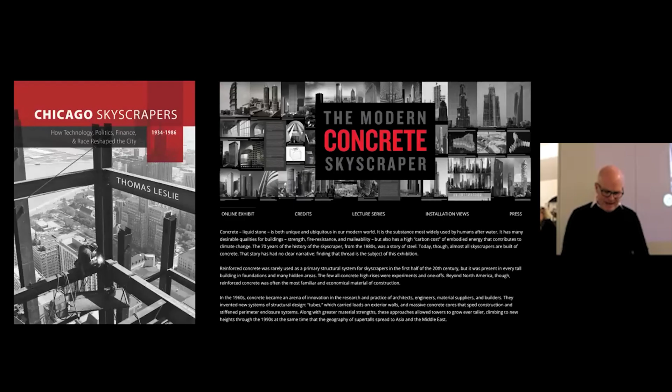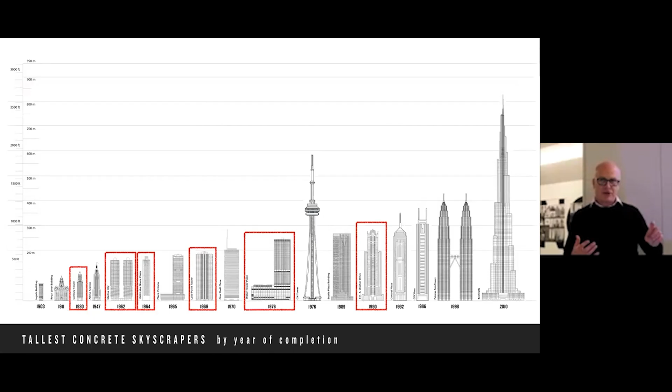The key moment for what I'm going to present tonight was, as we were putting together the timeline, Carol looked at it and said, you know, there are an awful lot of buildings here that are from Chicago, right? Chicago has a kind of outsized presence as we're looking at the tallest concrete skyscrapers throughout the 20th century. Is there a reason for that?

I couldn't come up with one initially, but we also realized that some of the buildings in the timeline were not in Chicago, but were designed in Chicago. This ended up being the sort of challenge for the research that I'll show tonight.

All good research projects ask more questions than they answer. And the exhibition really asked the question: what was it about Chicago that led to this particular phenomenon? And are there things we can learn from that, that we can extract from it?

So I want to go back to the beginning of the 20th century and talk about the trajectory of concrete in Chicago. I want to focus not so much on the buildings themselves, although they play a key role, but on not just the engineers, but another set of professionals and experts that lent their knowledge and their process to the quest for better concrete, and therefore the quest for greater height.

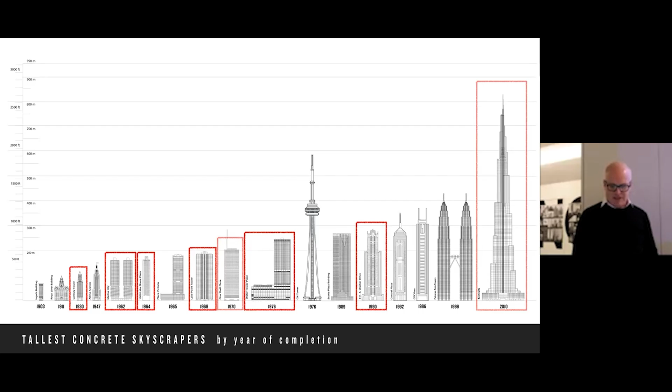Concrete in Chicago, I think you can trace back to the American pioneer of reinforced concrete, Ernest Ransome. Ransome was a British emigre. His family ran an artificial stone business in London, and he brought his knowledge of concrete first to San Francisco in the 1870s and 1880s, and then eventually to New York, where he famously built a handful of warehouses that pioneered his version of reinforced concrete.

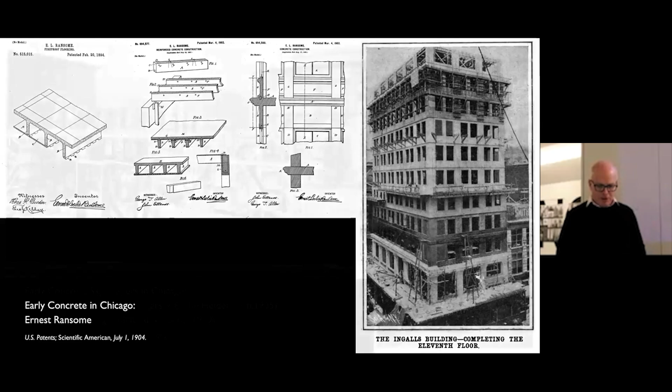And even though Chicago had nothing to do with it, I think you can look at the first generation of concrete high-rises or mid-rises that go up in Chicago and see the influence of Ingalls.

The material was relatively cheap. It could be built using carpenters instead of iron workers. And of course, it had a good track record by this point in containing fires, if not actually suppressing them.

If you look at the proportions, you realize that concrete was not a particularly efficient structural material at the time. Those columns are sized to carry loads. They're not the kind of fireproofing around a thinner steel column. The concrete is chunky and relatively weak, and therefore the material really has to be used in bulk to hold up the floor loads that it's being asked to.

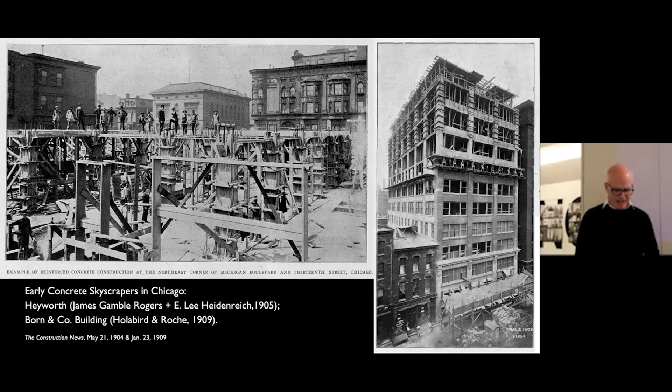Where there was innovation in the city was in a very different building type. The grain silos that populated the Midwest throughout the early 20th century were generally engineered by firms in Chicago.

Concrete around the turn of the century became the material of choice precisely because it was fireproof. Timber grain elevators built before 1900 tended to go up in flames very quickly, and concrete, as soon as it became commercially viable, was used as a replacement for timber.

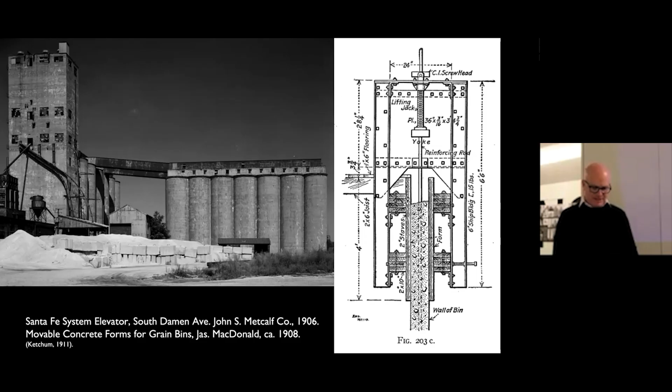Here you can see James MacDonald, an engineer who specialized in grain elevators. This is one of his patent drawings for a construction method we'd today call slip forming—concrete formwork on a circular plan that's gradually raised up as the concrete cures, so you can pour continuously from bottom to top. You'll see that come back in one particular set of skyscrapers a little later.

The buildings built around 1910 or so gradually show a few changes. You see the kind of skeleton frame that Ransome designed for Ingalls, which was the genesis of those early high rises. The skeleton frame kind of coalesces and starts to disappear.

The deep girders that carried the loads in the Born building and the Heyworth building start to get distilled into flat slabs and what were called mushroom columns—columns that flare out at the top, designed to prevent the column from punching through the slab, a phenomenon called punching shear.

These are heavily reinforced, and you can see them starting to look for ways to make the system more efficient. The girders drop only a few inches, which increases the floor height. The slabs get thicker, the girders get shallower, and you can start to see them coalescing towards what today we'd call a flat slab.

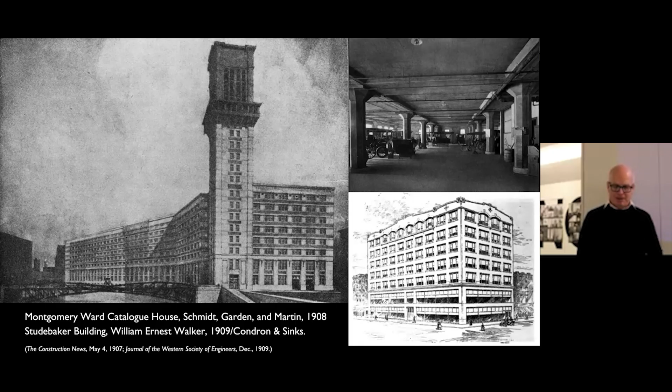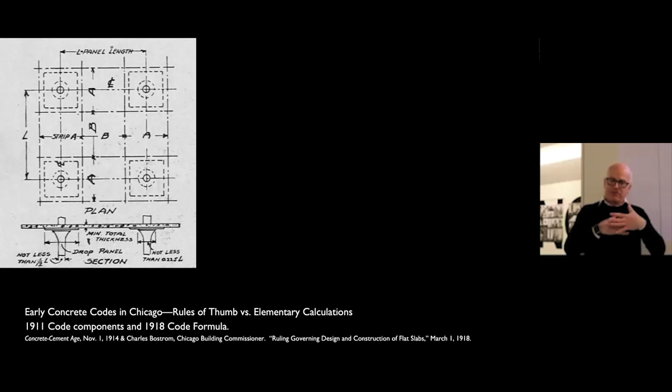The flat slab was the big desire in concrete construction because it stood to save on structural depth and therefore on building height. Flat slab is structurally thinner than a steel frame, so you could get more stuff into your warehouse, or higher floor-to-ceiling heights, say in an apartment.

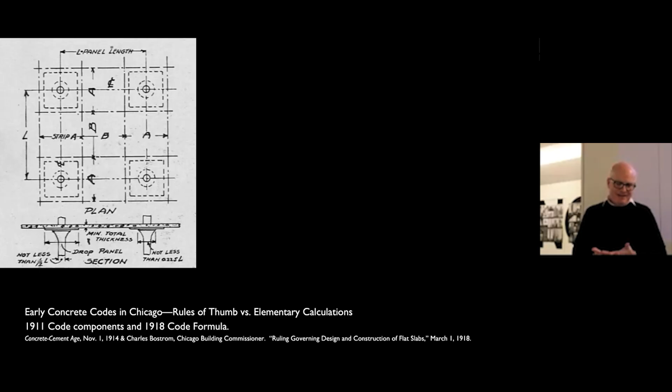The flat slab, though, is difficult to calculate because it's heavily reinforced and because the loads are carried in multiple directions. It's what we call hyperstatic, and therefore, even though it's very efficient structurally, it's very hard to figure out where those loads are going.

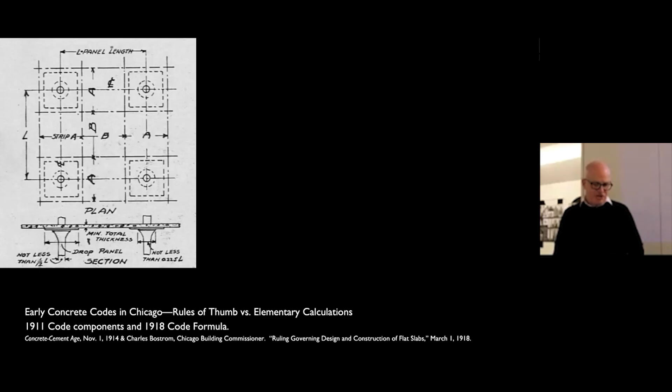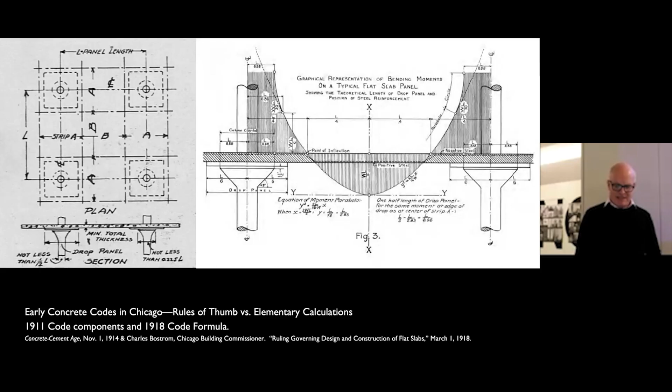Chicago, like most cities, struggled to figure out a way to encode flat slab construction. Here in 1911, this is from the Chicago Building Code, showing a very simple rule of thumb to try to calculate it. And here in 1918, a slightly more sophisticated version that estimates the maximum bending moment and tells you what the slab depth ought to be based on that, but that isn't yet theoretically based. This is still an empirical method of guessing at the maximum stresses in the slab and sizing them based on what's worked before.

Allowing the flat slab and giving some rules of thumb for its design led to a generation of flat slab construction in Chicago, mostly for industrial purposes—a dairy equipment production facility on the left, the Sharples building, and a paper manufacturer, the Moser Company building, that's still there now as nice lofts down on Printers Row. You can see that the slabs are flat.

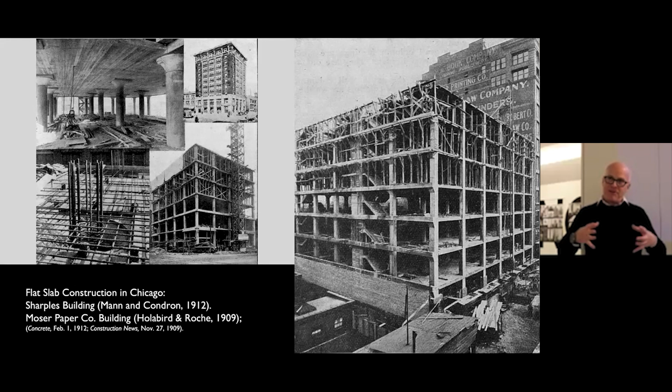They're not necessarily thin—in some cases they're 13 or 14 inches deep. And because they're so heavy, you can see the columns have to flare out or be thicker to take the so-called punching shear.

It's about this time that academics step in and start to see reinforced concrete as a place where they can contribute. One of the first examples of this, and certainly the most productive, is Dr. Arthur Talbot, who was a sanitary engineer hired by the University of Illinois to teach about sanitary engineering.

The material of choice in sewerage and water treatment is concrete, so Talbot gets very interested in the material from that perspective and begins conducting tests not only on the sanitary qualities of concrete, but also on their strength. He develops a laboratory that is still on campus—this is his 3 million pound concrete breaking machine in the lab. Good fun.

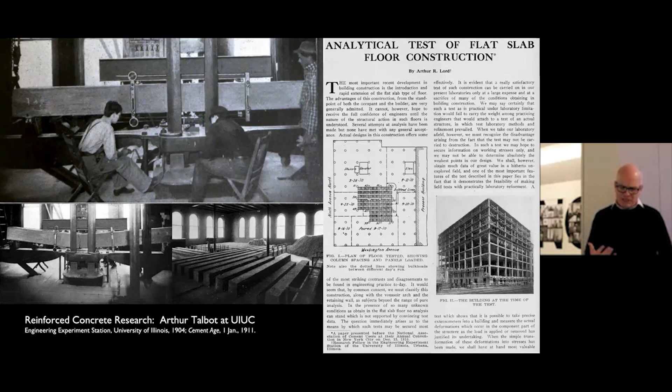He begins to develop theories that he can test in the laboratory to try to understand better how concrete, particularly reinforced concrete, works structurally. And to his credit, he does this in two ways. He builds and breaks reinforced concrete beams in the lab, as you see on the left, but he also goes out into the field and wires up buildings with rudimentary deflection indicators to try to understand how they're actually behaving under load. This is one of his first tests on a warehouse in Minneapolis.

Then in 1909, he gets the chance of a lifetime. There's a warehouse building constructed in the West Loop that has to come down because Union Station is expanding. This is on that site. Talbot comes in and is able to load it to failure. You can see on the right, loading up one of these slabs with pig iron. It's a mushroom capped slab, a very typical construction of the day.

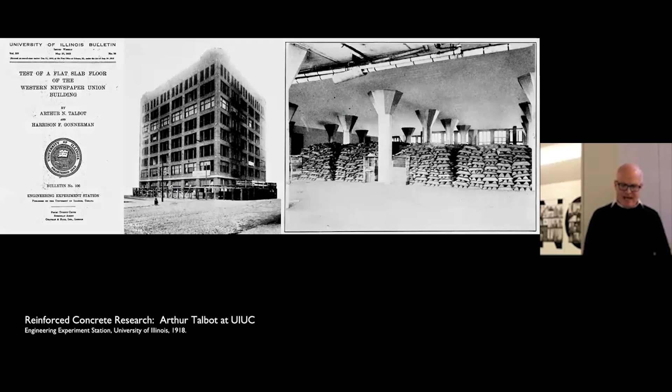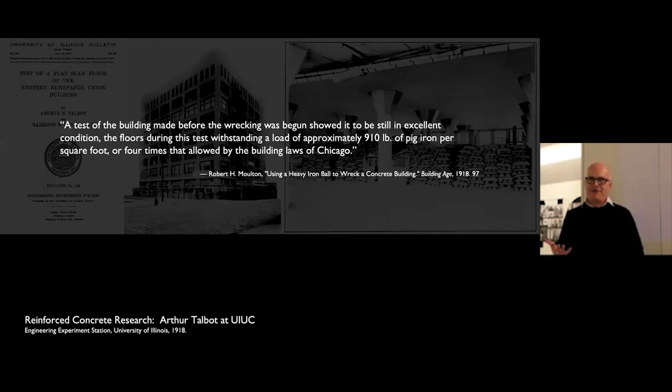What Talbot finds is that the building is much, much stronger than the code says it should be. Here's a write-up saying this is fantastic, concrete is much better than we thought. Talbot, of course, sees this as a failure, right? There is 4 times as much concrete potentially as there needs to be in this building.

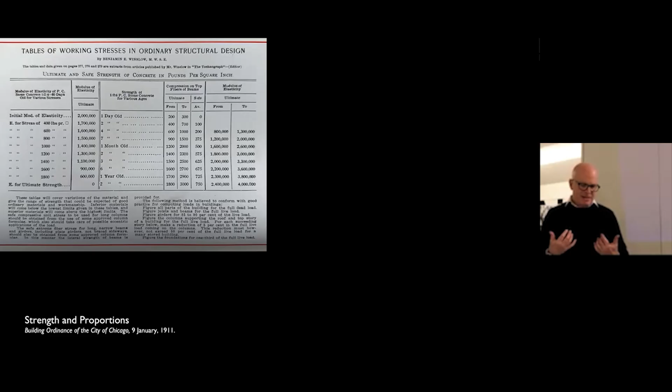Talbot begins to realize, and people in his lab begin to realize, that part of the problem is that they don't understand the concrete part of the equation well enough.

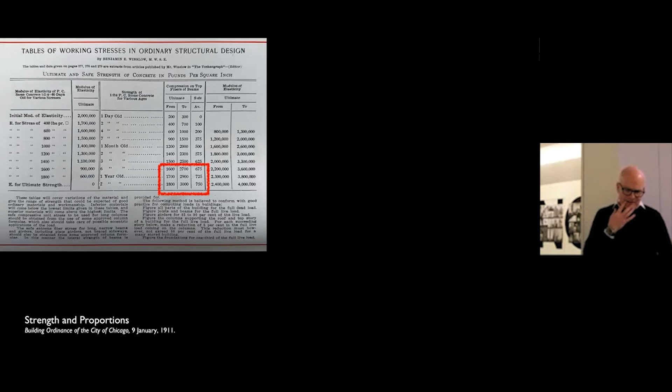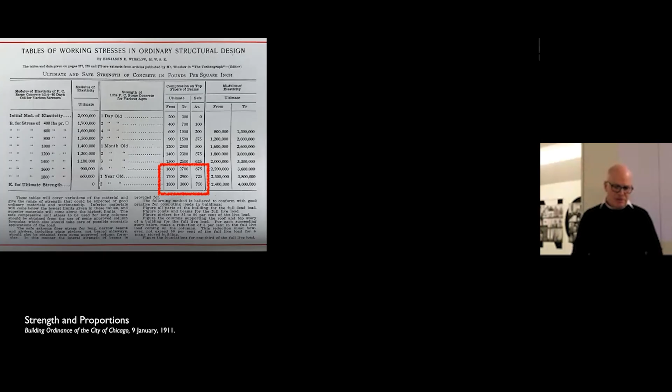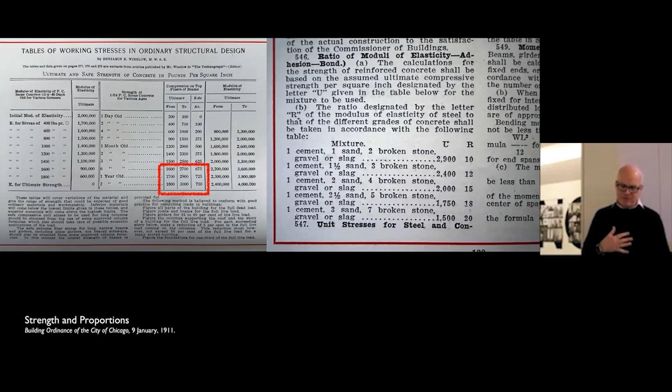Part of the problem is that this is also from the 1911 code, and it's a prescriptive code. It tells you exactly what the mix of the concrete has to be — a proportion of cement to sand to broken stone or aggregate. In particular, there's a mix that's 1 to 2 to 4: 1 part cement, 2 parts sand, 4 parts stone. The code says the ultimate strength of that is about 2,000 PSI, and it varies between 1,500 and 2,900 depending on how much aggregate you have. But the error bars on this, again, are huge.

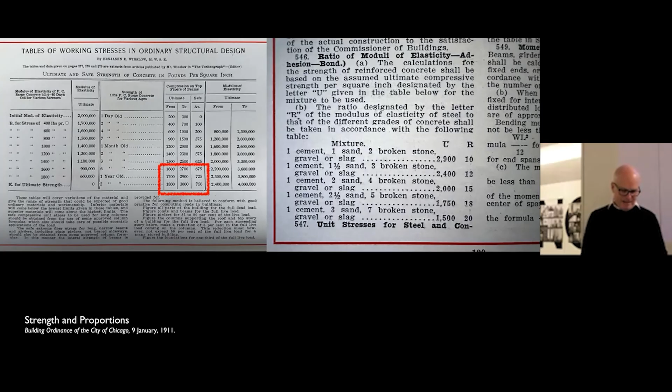Part of the problem that Talbot understands and that his lab begins to understand is that those error bars are part of the issue with understanding concrete. A graduate student in Talbot's lab, Duff Abrams, will later write a statement that sums things up: 'At present, we know a great deal more about the properties of reinforced concrete than of concrete.' What he means is that all the study has gone into the ways they put steel into the mix and how those slabs are formed and behave. No one has gone in and looked at the chemistry of the concrete itself. That is what Abrams sets out to do.

After he receives his degree from Illinois, he comes to Chicago. He gets a position at the Lewis Institute, a technical training institute, which will later merge with the Armour Institute to form IIT, the Illinois Institute of Technology. Abrams is there well before that, and you can see in his lab they're pouring various mixtures of concrete and then testing them to destruction. They're less concerned with the reinforcement and more concerned with the chemistry, or the recipe, of concrete. It's an incredibly prolific laboratory.

They churn out a couple dozen papers, one of which in particular, 'Design of Concrete Mixtures.' The Portland Cement Association a few years ago did a poll of the top 20 innovations in concrete, and this paper was listed in the top 4 or 5.

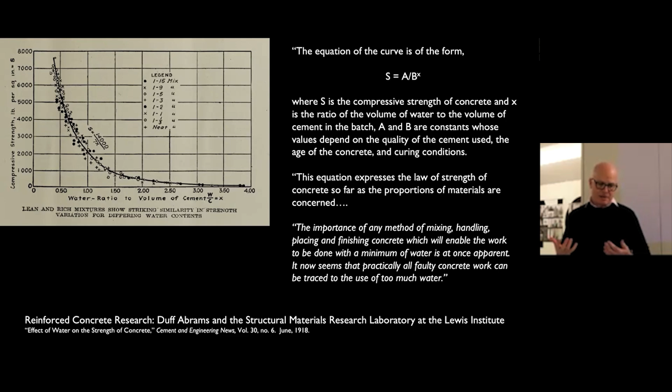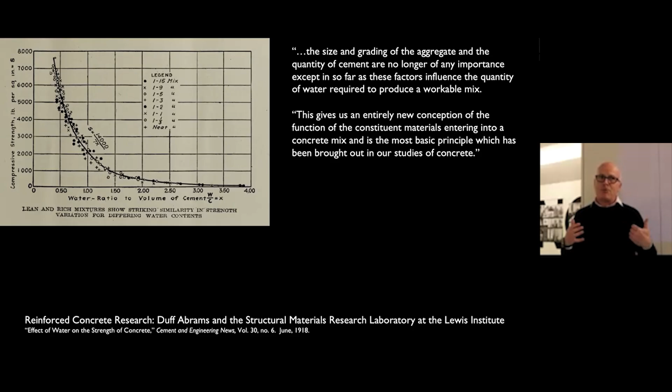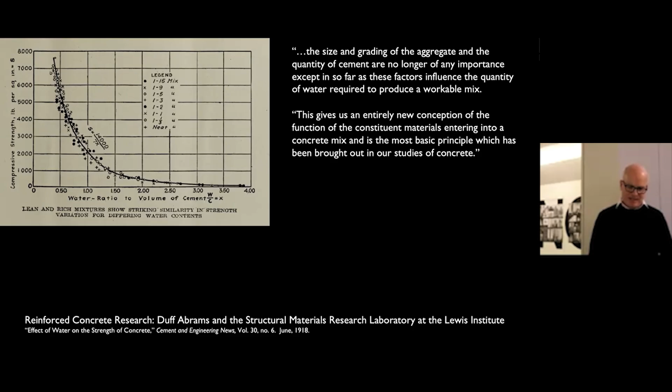This is a chart summarizing his findings. He says basically what you use for aggregate, how you proportion that aggregate, doesn't really matter - we'll come back to that, not exactly right. But he says the much more important factor is how little water you can use in the mix. Up to a certain point, the less water you use, the exponentially stronger that concrete will get. This realization will form the basis for a lot of concrete science in the material sense over the next 20 years or so.

To Abrams' credit, he wants to take this outside of the lab. Writing about the work at the Lewis Institute, he says these experiments have the full support of all the cement manufacturers they're working with. Crucially, the manufacturers understand they can't just sell product - part of what they're selling also has to be service to the engineers and contractors, teaching them how to make a first-class product in the most economical manner. So Abrams wants to take what he's finding in the lab and get it to the construction site.

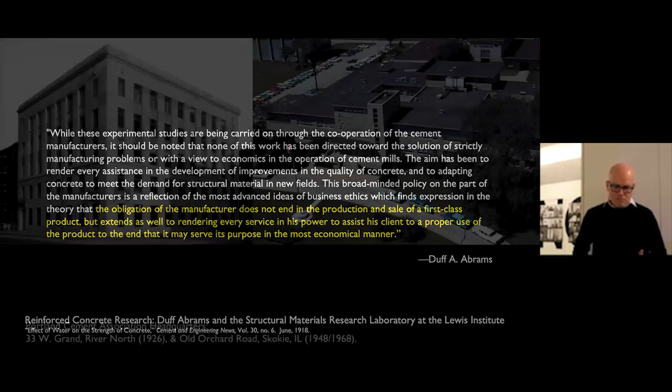The way he does this is to merge his laboratory with a fledgling industry association called the Portland Cement Association, one of a handful of institutions looking at concrete as a new material - marketing it, representing manufacturers and aggregate suppliers, and trying to get this material onto the job site in a way that engineers can trust and contractors can handily place. PCA ends up being one of a couple of these institutes, with the ACI, American Concrete Institute, being another that pushed the idea that research into the material would make for a better, more reliable, safer product.

Alongside Abrams' papers on concrete mixes, you can see PCA is all over the place - they want the backyard builder to understand how to make and use concrete for a driveway, they're interested in the architectural finishes of concrete, and they're also interested in how to make it better both in the mixing yard and on the job site.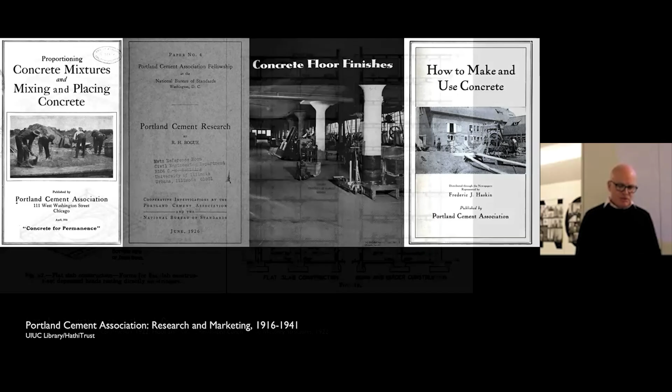When the Portland Cement Association begins publishing and getting that knowledge coming from Abrams' lab and elsewhere out there, you do start to see concrete being used more regularly in high-rise construction.

These are examples of the sort of thing being published in the 1920s - both how to form the concrete, drawings about how to make these mushroom caps crucial for the structural behavior, and also the benefits of concrete. If you use flat slab construction, you get a thinner structural section, meaning you can get 10 stories in the same building height as you could get 9 stories in a typical post and beam system. That goes not only for concrete, but also for steel and even timber - concrete gives you a more economical section, and therefore a better return on investment.

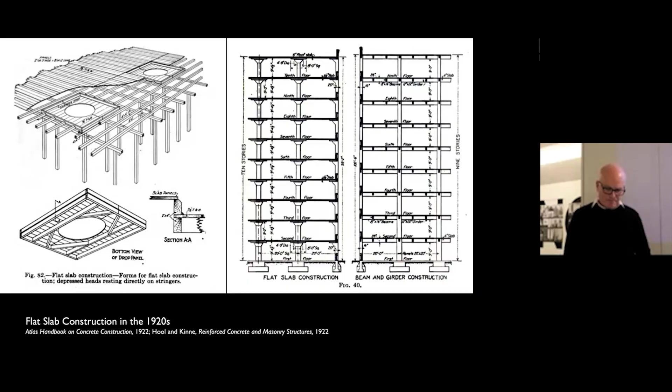In Chicago and elsewhere, but almost typically in Chicago, you see concrete being used in a variety of ways. The flat slab becomes the default construction material for apartment buildings, especially where you don't have a lot of mechanical services and don't need a ceiling void to distribute them. Sometimes this is a hybrid - the Edgewater Beach Hotel is a steel and concrete hybrid, with a steel skeleton for much of this original building clad in concrete, so concrete is still being used mostly as fireproofing.

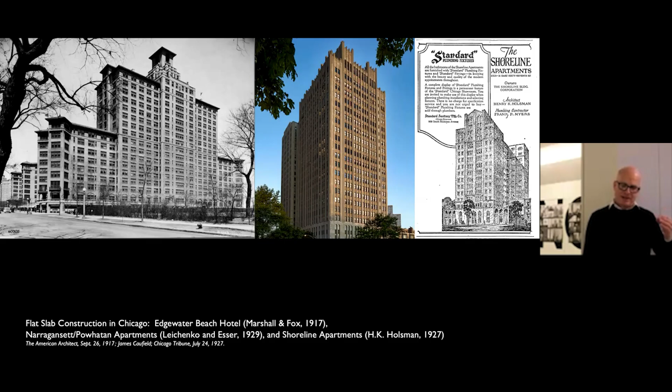But for some of these other buildings, especially the shoreline apartments, these are flat slab buildings using the latest technology, trying to find ways to increase the strength of the concrete to take up less space, not only in section but also in plan, trying to make the columns as small as possible.

The Depression, of course, stops high-rise construction in Chicago of all types. When it picks up again after World War II, we see concrete coming back in residential construction, especially in Chicago in these early, very progressive housing schemes designed by Harry Weese, SOM, and others. They're interested in squeezing the most number of floors into the minimum amount of height, and flat slab concrete again is crucial in doing that.

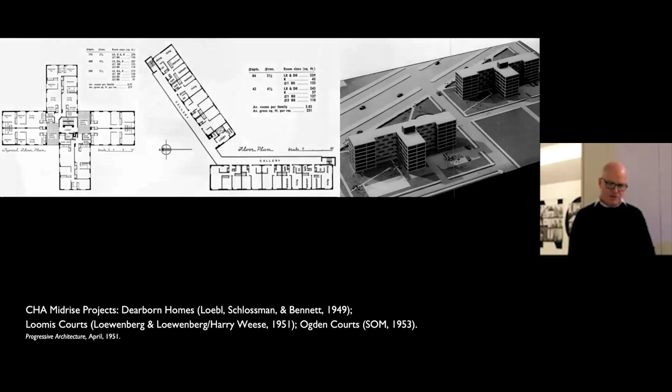More kind of middle class or upper middle class construction also uses this. Mies van der Rohe's first skyscraper, famously, is a concrete apartment building on South Lakeshore Drive. You can see in the digital reconstruction here that he's using a very conservative technique at first.

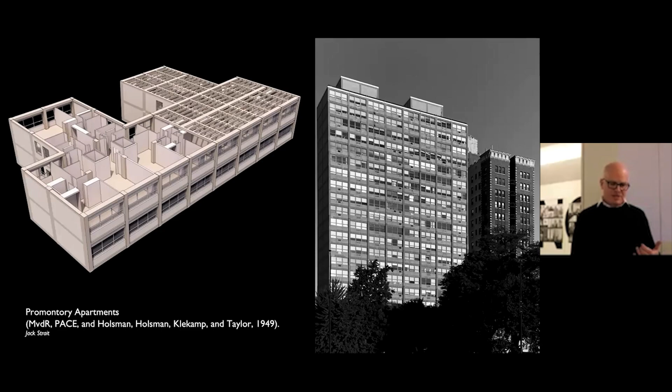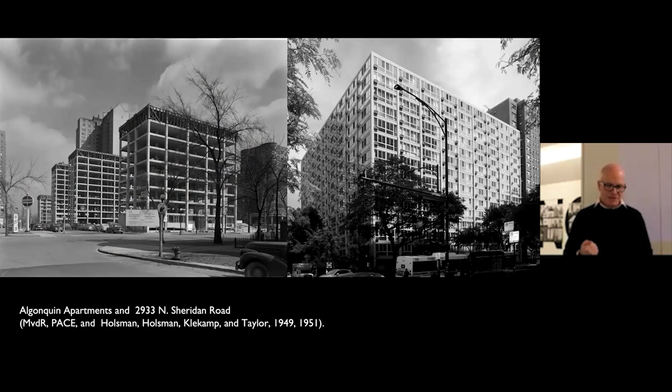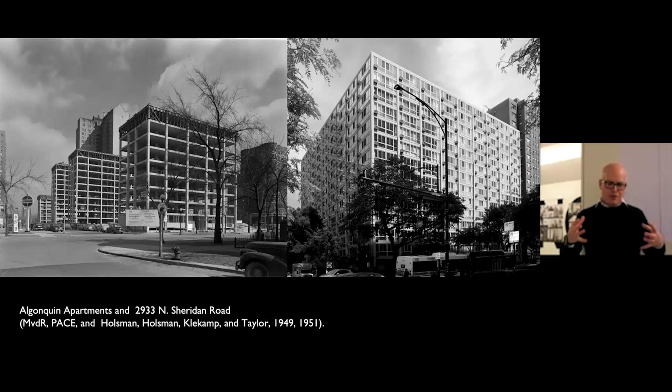This is a pan joist system, so it has drop girders, it has joists, it's less efficient than a flat slab. But in the second and third concrete apartment buildings that he does in 1949, 1951, you can see from the construction photo that he's using a flat slab. And this is a flat slab that now is about 10 or 12 inches thick. Columns are sized to take the punching shear, but also to take the load of all of these heavy slabs as they sort of come down the building.

Interestingly, 860-880 Lakeshore Drive, his most famous apartment buildings, are steel. There's some evidence in the oral histories that the steel industry donated a lot of the material to make steel economical. But when Mies and the same client got commissions for the kind of sequel to 860-880, 900, 910, the Esplanade apartments and Commonwealth apartments in Lincoln Park, both used concrete.

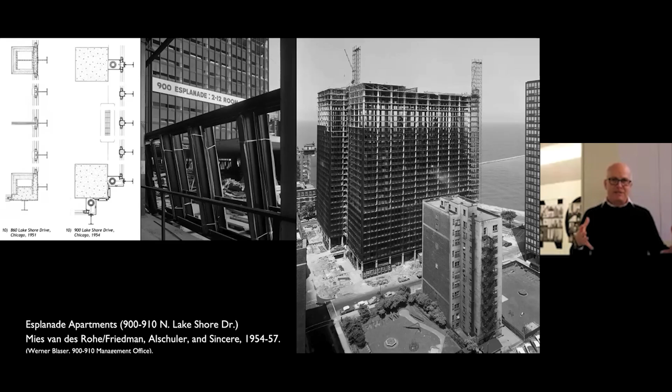And on the left, the plan drawings, you can see that the steel is spatially more efficient as a column, right? The concrete is bigger. But in going in and looking at the drawings, what you discover is that the concrete is much more efficient in section. The 10-inch structural slab that it takes to span the apartments in 900, 910 is half the structural depth that the steel was to span a similar dimension at 860-880.

And with some kind of turning the floor to ceiling height down a little bit, you can see that we now have, instead of a 10-foot floor to floor height, less than 9 feet. And what this means is that 900, 910, even though it's about the same height as 860-880, has 3 more apartment floors in it. So greater return on investment, better acoustics, et cetera, et cetera.

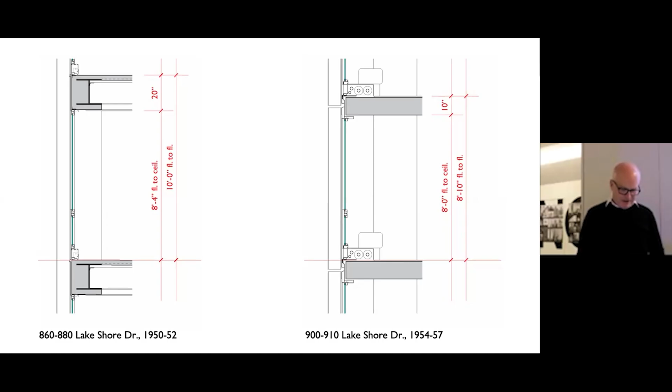Concrete in Chicago gets used for apartment hotels as well. So this building by Milton Schwartz, Executive House, in 1960, was 39 stories, the tallest concrete structure, tallest concrete occupied structure on the planet.

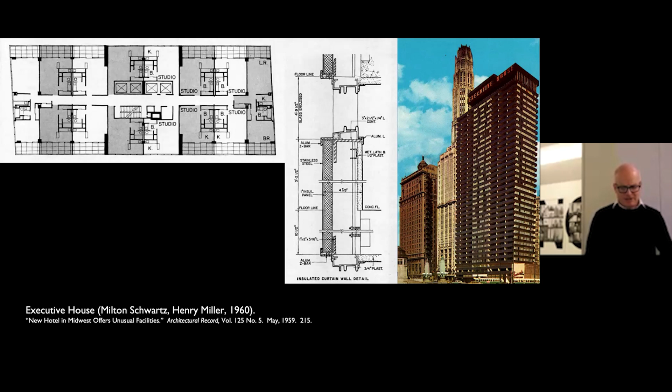So this is the first of those buildings after World War II that sets the record in Chicago. And it's nothing particularly special. It's held up by shear walls and columns. And the concrete at this point is about 3,000 to 3,500 PSI. So it's not a huge improvement over the strength of concrete before the war, but it's beginning to think about ways to deploy that material in more structurally efficient ways.

The real kind of turning point is in 1961. And some of this is due to construction innovation, and some of it is due to kind of material science. The construction innovation comes about on Marina City, maybe the most famous concrete skyscrapers of the era, certainly the most distinctive. And a couple of different factors come into play here.

One is there's an architect, Bertrand Goldberg, who is super innovative and looking to create new forms, new building types in a way, and also to use whatever the most advanced structural and construction techniques he can. This is like one of the first buildings that is conscientiously of the space age.

So on the right, you can see those are slip forms, just like the grain elevator that we were looking at from the early 20th century. Those slip forms are slowly climbing, and they're basically building these two giant grain silos, exactly the same technique, continuous pours as those things climb up.

The detail on the left shows McHugh Construction, the contractors, using fiberglass formwork to form these doubly curved balconies at the edge of the building. McHugh pioneered the use of fiberglass forms.

They understood that the curvature that Goldberg wanted, not just in plan, but also in section, was going to require very, very complicated formwork. And rather than setting millions of carpenters to work on it, they built one jig, made about 60 fiberglass boats, basically, over the top of that jig, and then used those fiberglass forms again and again and again as the construction proceeded up the cores.

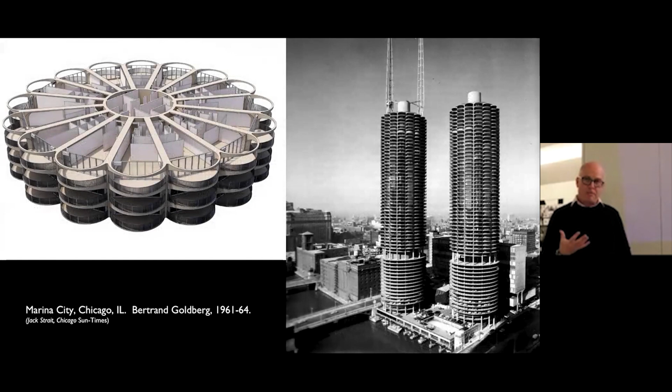Fiberglass forms left a better finish. They were also reusable a dozen or so times. And so McHugh really pioneered this way of creating complicated forms in concrete.

Complicated forms that could take advantage of concrete's monolithic nature. So every piece of Marina City is connected to every other piece. And when the wind blows on one side, every bit of concrete is kind of feeling it. So the concrete is kind of all one piece. It's taking advantage of that monolithic behavior. And it's also being cast in forms, the cylinder being the kind of ideal column shape that are particular not only to concrete and slip forming, but also structurally ideal.

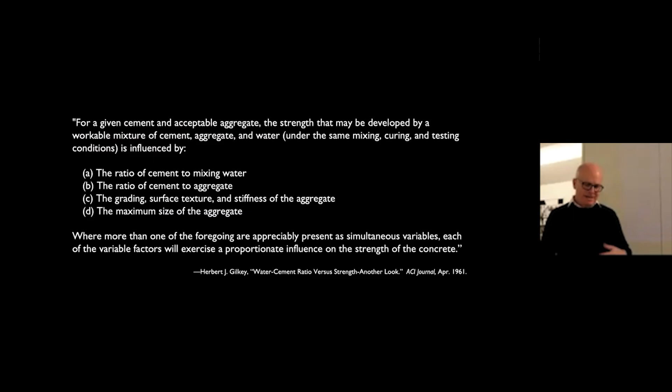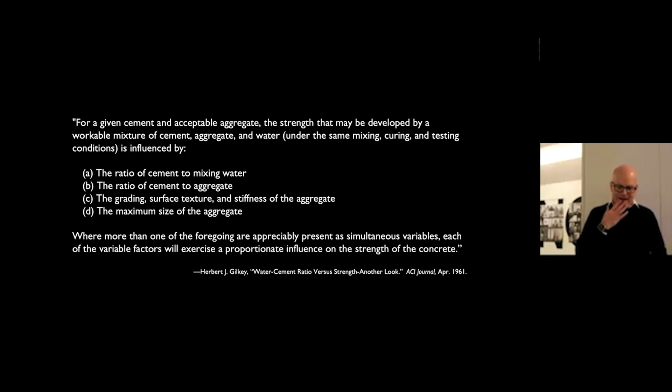It's about this time too that Abrams' initial paper gets revised a little bit. A mechanical engineering professor at Iowa State, Herbert Gilkey, writes a paper in 1961, 'Water Cement Ratio versus Strength, Another Look,' where he looks back at what Abrams was doing and says that Abrams was a little too quick to dismiss the idea of aggregate.

Because the family tree is so interesting to me, Gilkey teaching at Iowa State was fascinating because I spent a number of years teaching there. It turns out Gilkey did study under Talbot and actually taught at Illinois very briefly. He had to leave because he married Talbot's daughter, and because of the state's anti-nepotism rules, that was not allowed. We do things differently downstate than we do in Chicago, very clearly. But to me, this is further evidence of Talbot's importance and influence—there is in fact a very strong connection here.

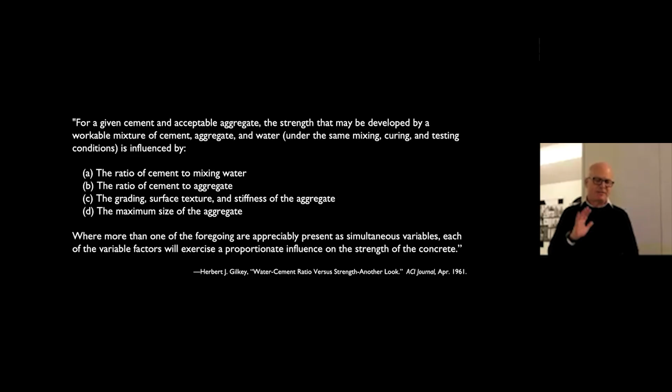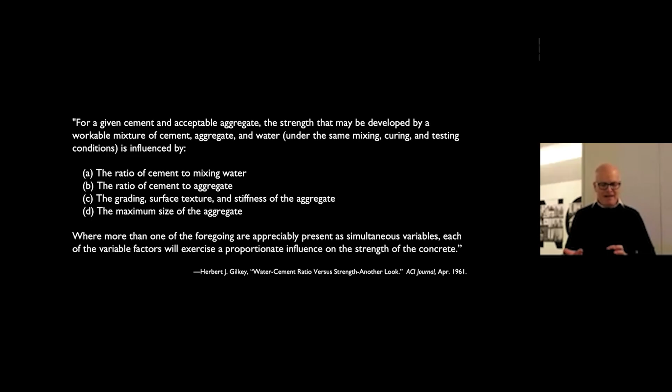What Gilkey argued was that yes, the ratio of water to cement is vital—Abrams was right about that. But he says there's a lot of strength left to be had by looking at the proportion of cement to aggregate, and by looking at the aggregate itself. So what is the strength of the aggregate? What's the size? What's the texture or roughness of the aggregate? And how big can you get it?

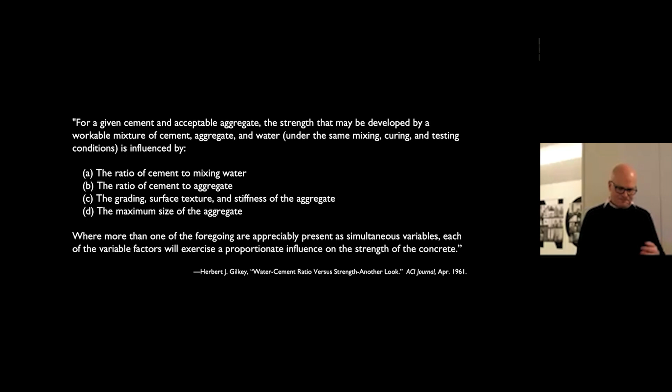This turns out to be key to the huge jumps in strength that we see in the 1960s and 70s. Some of that is geologic.

This is the Thornton Quarry that for many years was owned by a company called Material Service Corporation. Material Service was owned by the Crown family, a big name in Chicago finance and in construction. For many years, Material Service was just a run-of-the-mill concrete company in Chicago.

Their yard, so-called Yard 1 in Chicago, is located on the Chicago River, so they can bring in aggregate from a wide range of sources—not only from Thornton Quarry, but from Minnesota, Michigan, other places on the Great Lakes. And it's only 15 minutes from the Loop, so it's a short drive for the trucks to take the material to the job site to get it placed, but also tested really rapidly.

This becomes, I think, the most important concrete laboratory in the country over the next 20 years or so. There are two engineers working for Material Service: Jaime Moreno, who is an Illinois graduate but in agricultural engineering, not structural engineering, and John Albinger, who is still the subject of research and some questing.

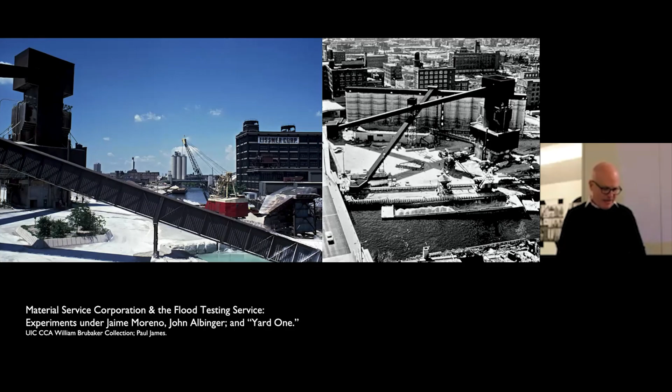Together, they begin working with local engineers and local contractors. They begin experimenting not only with all of the variables that Gilkey is talking about, but with admixtures—in particular fly ash and silica fume, both of which are really, really fine powders that essentially replace water in the mix, making for plastic flowing concrete without adding a great deal of water.

In addition to supplying material to job sites, Moreno and Albinger are part of the Chicago Committee on High-Rise Buildings, which looks at all aspects of skyscraper construction throughout the 60s and 70s. In 1977, there's a task force report that Moreno co-authors, publishing dozens and dozens of pages showing that by tweaking the size and type of aggregate, by adding fly ash and silica fume, and by experimenting with those proportions, you can get exponentially greater strength—even beyond what Abrams thought possible.

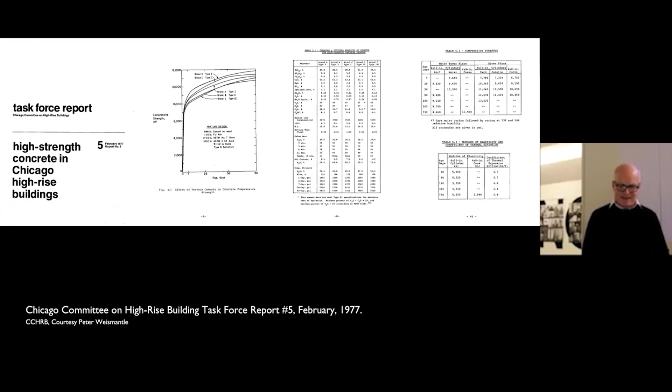Interestingly, in the report, none of the aggregates are actually called out—none of the materials are called out. Material Service kept all that information proprietary, but they released the results of the tests as a way of explaining to the profession that these mixes have not only been tested, but experimented with. We know when we send a mix out to your site, we know very precisely how strong it can get.

Albinger later writes that he saw Material Services treat every job basically as a laboratory. They would get a contract for a certain strength of concrete and say, we can absolutely do that - we've experimented with it, we can get 4,000, 5,000 PSI. But we also have this experimental mix that we think is like 6,500 or 7,000 PSI strength. Can we use that on your job site? Can we test it? Can we have it go through the same testing procedures as the normal concrete, and see how it performs not just in placement but also long-term - does it behave the same way as the other concrete we've been sending you?

Contractors agree to this, engineers agree to this, architects agree to this, and it becomes this amazing back and forth, this collaboration between one materials provider and the rest of the profession. This is a photo of Water Tower Place, a building I'll talk about shortly. Paul James, the site engineer for McHugh, talks about this as an ongoing conversation - because Yard 1 is literally right there, because Material Services is available, because the Portland Cement Association is just up in Skokie, that knowledge exchange was frictionless, and people were willing to share what was going on. Maybe not the actual recipe, but the results they were getting in Yard 1, to test it up in Skokie as an independent test, and then see how it was actually operating on the job site.

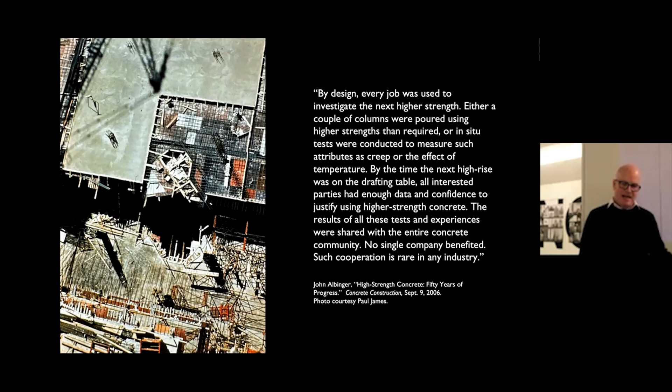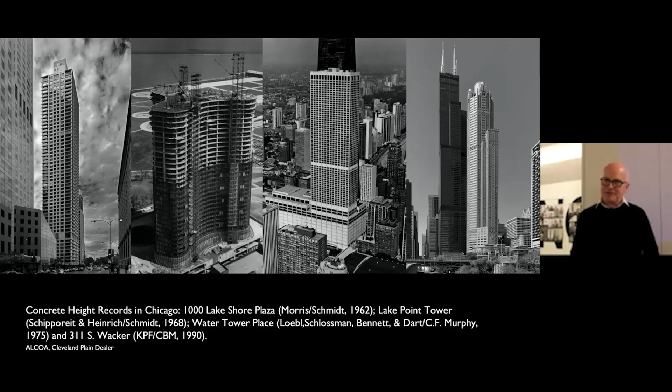Between those, there are iconic buildings like Lake Point Tower, the curvy Mies nod out by Navy Pier, and Water Tower Place - not only a record setter for height, but also a building with a hotel, a shopping mall, two Broadway theaters, and a parking garage. So the concrete is not only doing typical beam and slab or column and slab work, it's also engaged in very, very long span trusses, for instance over the theaters, which the architect, of course, put in the basement - the toughest possible place to put a long span.

So you can look at these buildings as record-setting heights - Marina City, 1000 Lake Shore Plaza, Lake Point Tower, Water Tower Place, 311 South Wacker - all of those set records for height. But there are also these buildings that Material Services worked on in between, where they were experimenting with high-strength concrete for other reasons: the architect wanted the columns to be smaller, or they thought they could get greater height with less area down at the base in concrete. Those buildings all set records for concrete strength.

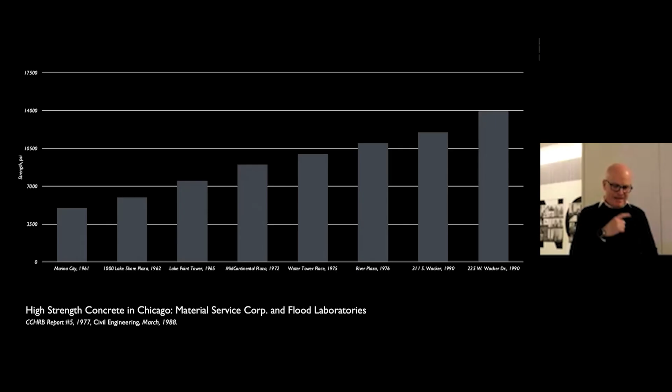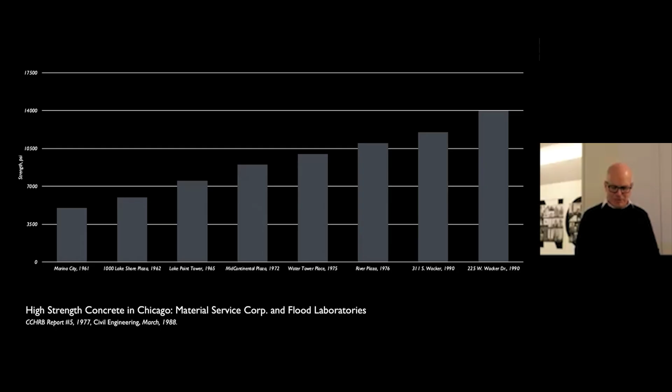And even though there's a basic relationship between how strong the material is versus how tall you can go - this is now concrete strength instead of concrete height - some of these were strong without being tall. It's interesting, and potential future research, to understand why exactly that was, what happens on a building like 225 West Wacker, which is a relatively small building, but used these apparently to get an adequately sized parking garage in a relatively tight space.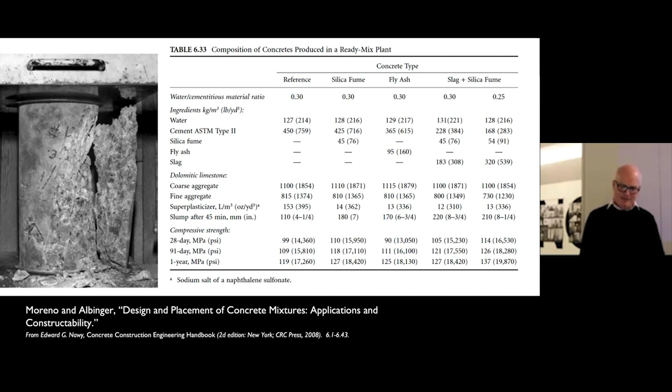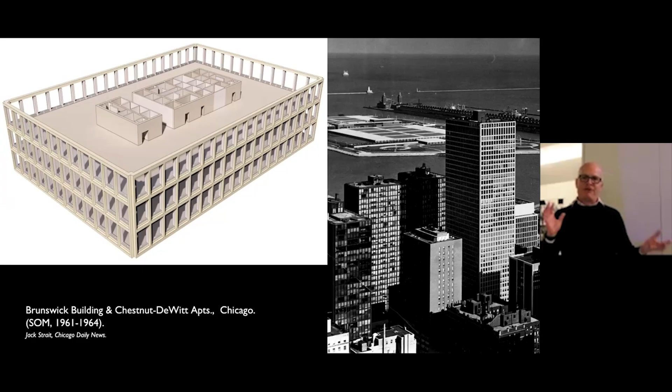Members of the Chicago Committee on High-Rise Building and contributors to the task force reports were Faz Khan and others at SOM, who began to experiment with this higher strength concrete in new forms. So if by now we've answered Duff Abrams' question about whether we know enough about concrete versus reinforced concrete, let's flip the conversation and talk about what reinforced concrete can do.

SOM and Faz Khan understood that the tube structure, the hollow column that forms the core, for instance of Marina City, is the most efficient shape. If you push all of the structure in a building out to the perimeter, you get a form that's naturally stronger. That firm looked not only at steel tube designs like the John Hancock Building and Sears Tower, but more of their tube designs were actually in concrete.

Brunswick Building on the left relied on a tube with a core of shear walls, and DeWitt Chestnut, the tall building on the right, is literally just a concrete tube on the outside supporting apartment floors within.

SOM recognized the possibility in formal gymnastics that you could get with a tube structure, and that concrete allowed in ways that steel didn't necessarily suggest. So One Shell Plaza, one of their tube structures from the early 1970s, even though it follows the basic boxy tube, uses concrete's plasticity to make these deeper columns where the loads are being collected and brought down to the ground over the entrance.

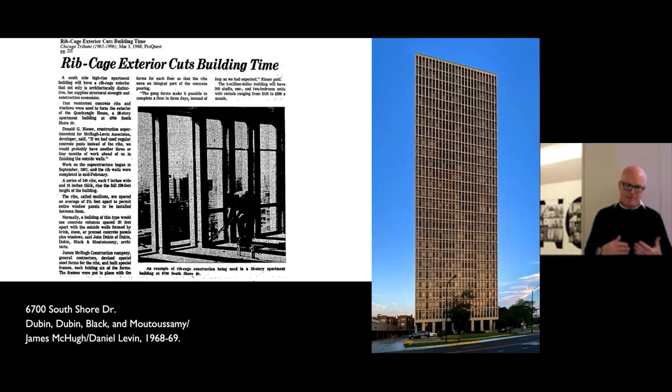One set of architects I've explored in the book that I think deserves a little more credit is the firm of Dubin, Black, and Moutoussamy. They designed tube structure apartments all over Chicago - South Side, Lincoln Park, North Side - where they took Faz Khan's tube idea and combined it with McHugh's flying forms, this time in steel rather than fiberglass, as a way to make the exterior of the building not only strong, but also quick to build. High strength concrete plays a big role here. All of those things that look like mullions in the facade are actually columns, doing the work of holding the floor slabs up. By distributing the weight of the floor slab over many columns, you solve the problem of punching shear in the opposite way from the big, heavy mushroom columns.

Another area that deserves further discussion is composite structures - taking advantage of steel's quick construction and concrete's ability to serve as both the gravity and wind bracing systems. Here on the left is a Faz Khan tube structure with a sort of peculiar interior. This is on the site of the Union Station head house that replaced the Western newspaper building that Abrams was able to test back in the 1910s. Because it's over active rail lines, the structural system Khan developed was a concrete tube on the outside and lighter, more flexible steel on the inside that could be woven down through the tracks.

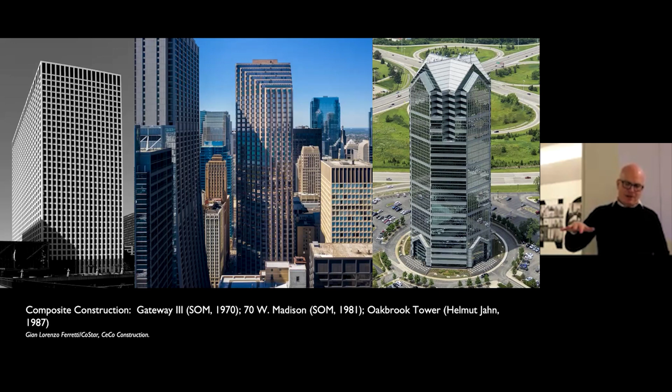More typically, buildings like 70 West Madison or Oak Brook Tower use composite construction in exactly the opposite way - a concrete core in the middle that started first and goes up, usually the basis for a tower crane, and then the steelwork is built around it and catches up by the time the core reaches the top. Chicago is a natural place for this for a number of reasons, one of which is that the Steelworkers Union in Chicago does not object to having workers in other trades above them, as they do in New York. So the core can go up first, followed by the steel work, in Chicago, as it doesn't maybe here.

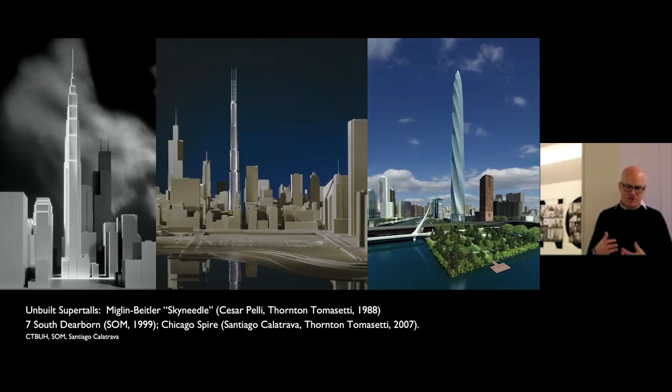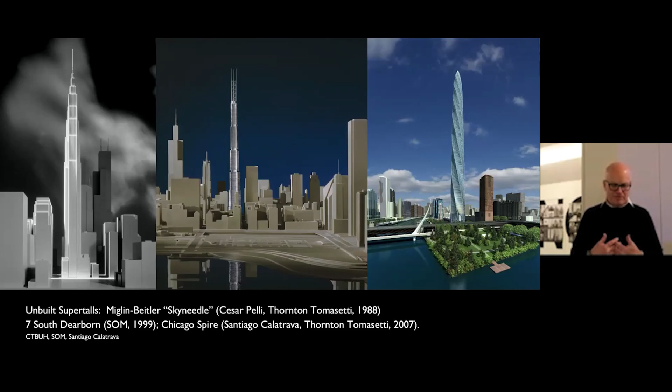That kind of expertise, I think of almost as a flywheel effect - all of this knowledge about concrete, all of this collaboration between material sciences, architects, and engineers in Chicago leads to a culture of sharing. The Committee on High-Rise Building is one of these organizations. You see that knowledge - structural engineering, the logic of material science, architects trying to figure out how to put these things together - in some of the earliest supertall proposals. Some of them happen in Chicago, or the designs happen in Chicago. They're proposed for Chicago, and none of these three obviously are built.

Miglin Beitler's Sky Needle, engineered by Thornton Tomasetti, relies on a kind of strong core and then 4 pairs of giant pier walls on the outside.

And more exotic structures like 7 South Dearborn in the middle, which is called a stayed mast, basically thinking about the building almost like it's a giant radio antenna, and the Chicago Spire, which Calatrava did with Thornton Tomasetti.

Even when super talls get built elsewhere in the world, the engineering has often been in Chicago, and has often been based on the kind of concrete knowledge that accumulated there.

Tower Palace 3 in South Korea was SOM's kind of prototype for the buttressed core that ended up structuring the Burj Khalifa. And we do have one of these, or a couple of these, in the city: 401 North Wabash.

SOM's building that they did in 2009 uses concrete, high-strength concrete, for an outrigger truss—17,000, 18,000 PSI concrete, at least in the base.

And then this innovative way of balancing or bracing the building, as if the core were kind of holding ski poles to either side. So with a couple of unbuilt and a couple of built ones, I'll leave it there.

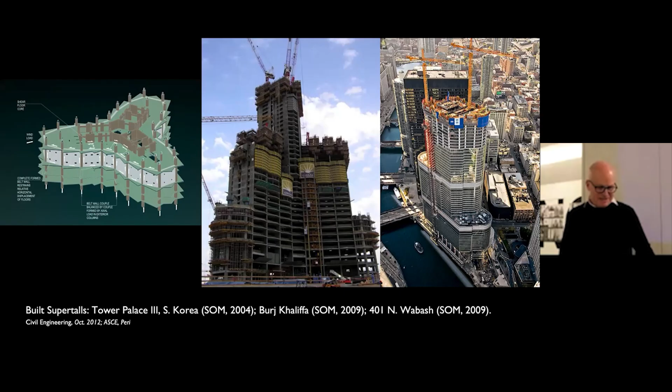It is interesting to me that 401 North Wabash and Marina City are literally 200 feet from each other on the Chicago River. And they frame about 48 years of architectural innovation, engineering innovation, but also concrete innovation, right?

3,500 PSI on the left, up to 16 or 17,000 PSI on the right. The fact that there is an absolutely classic steel-framed Mies van der Rohe building between them, to me, is just kind of the punchline to the whole thing.

As Carol said, this has been this kind of glorious rabbit hole, and a lot of the people—the Chicago Committee on High-Rise Building is still active, and they were very generous in making me a member a couple of years ago. So I've been able to talk to some of the people, both who were involved in some of these buildings, but also people who remember people who were involved. Those conversations have been important in sort of scoping out what this story might be.

Ongoing, lots of questions still to answer, but I think a story that answers some of the questions about why these buildings in that particular place and why that particular material. So thanks.

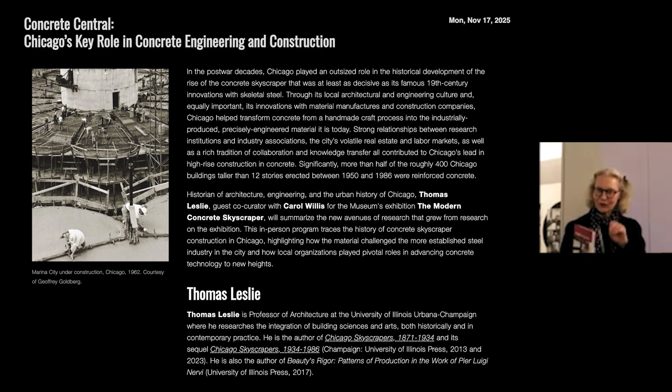I'm holding up the second of his books on the Chicago skyscraper, which covers where he left off in volume one, from 1934 to 1986, on how technology, politics, finance, and race reshaped the city. Mr. Chicago Skyscraper is here to explore the importance of location and influence in the innovation of the modern concrete skyscraper.

You talked about it a bit, but could you remind me what about the concrete pillars allows the floors to be so significantly thin versus with steel?

So the way I think of it—this is an architect talking, right, there are engineers in the crowd who are going to laugh at this—steel is strong because of its shape. We can take the material and turn it into a very efficient shape. Concrete, we're stuck with a fairly crude way of making it, so concrete is strong because of its bulk basically. The reason a steel I-beam is strong is that it's deep. There's not a lot of material to it, but the material is in the places where it's going to do the most work, and that means a tall beam that's able to resist bending a lot.

Concrete, we can't do that so easily, so we just throw as much material in as we think we need, and it's the bulk of the concrete that makes it work. So that concrete floor is much heavier than a steel floor, but it's much thinner. From an architect's way of thinking, that's the trade-off.

But at the same time, could you talk about the philosophy of minimum use of materials as both an architectural and engineering idea, and how that plays out in concrete?